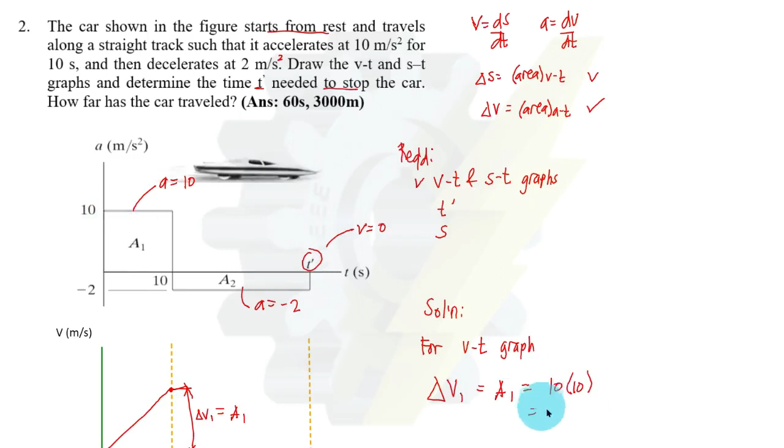So we can solve delta V1. Sabihin natin, ito yung ating delta V1 equal to A1. So ito ay sloping up to the right. Then yung A1 ay equal to area dito: base ay 10, height ay 10 din. So 10 multiplied by 10, we have 100 meters per second. So this is 100. Ang initial velocity natin ay 0.

Then next, we have negative A. And then our final velocity based from the problem is 0. So magre-rest siya dun sa T prime. So we can just simply connect this point to this point. Ang delta V natin from 10 to T prime ay negative 100. Okay, kahit di nyo na ilagay yun, kasi alam natin 0 yung final velocity. So now we have the VT graph. Next, we have the ST graph.

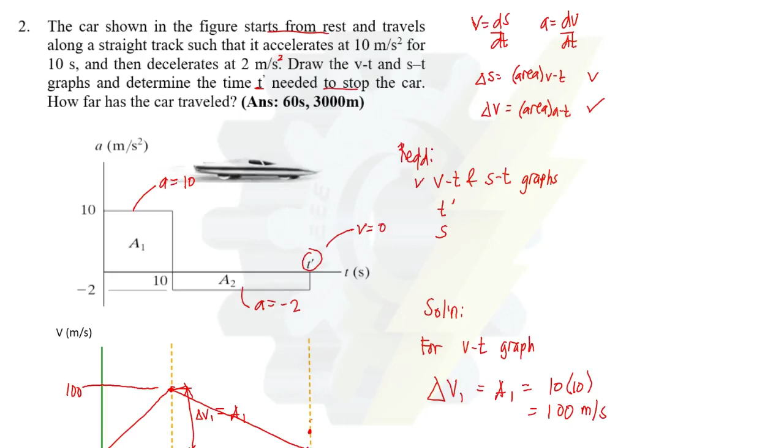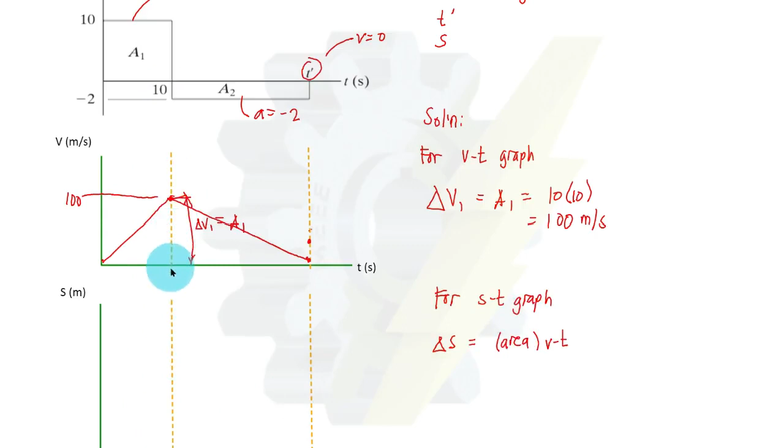Ang next relation na gagamitin natin ay yung area at VT is equal to delta S. Doon tayo sa first segment, 0 to 10 seconds. Yung broken line, ibig sabihin, yung time natin dito ay pareho lang dun sa nasa taas. Okay, so ito ay first degree. Alam natin na pag first degree at increasing, ang ating curve for S ay concave up. Ang susolve na lang natin ay yung delta S dito. This is delta S1, and that is equal to this area. Let us denote this as area sub 3. So delta S1 is equal to area sub 3.

This is equal to area of triangle. Ito ay 10, tapos ang height ay 100. So 1/2, base ay 10, height is 100. So this is equal to 500 meters. So this is your 500. Then next, ito, alam natin, sloping down to the right. Pagka ganyan yung ating velocity, ang ating S ay concave downward.

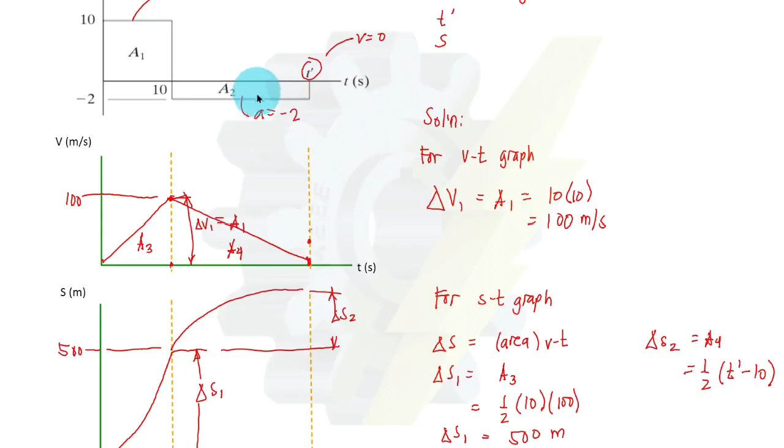So let us solve delta S2. Let us denote this as delta S2. That is equal to area 4 or area of triangle. So 1/2 base. Yung haba nito, mula dito sa point na to hanggang dito, ay t prime minus 10. Wala pa tayong t prime, and yung t prime ay isa sa mga unknown. Pero pwede na nating i-solve yung t prime based dito sa relation ng AT tsaka ng VT. Kahit yung t prime yung una nating sinolve kanina sa first solution natin, pwede.

So for t prime, from the relation, delta V is equal to area at AT. Ang delta V natin, take note, hanggang dito sa point na to. So yung velocity at t prime minus yung velocity at 10 seconds. Yung final velocity natin, sabi natin kanina, ay 0. Then yung velocity at 10 seconds, alam natin ay 100 meters per second. So again, we can use the relation area at the AT curve is equal to delta V. This time, say this is delta V2.

Delta V2. So yung area dito, base, ay t prime minus 10 multiplied by height is negative 2. So that is equal to delta V2. So negative yung V sub 10 or yung velocity at 10 seconds. So 100. Then from here we can solve t prime. So that is equal to 60 seconds. So dito pa lang kanina pwede nating i-solve yung t prime.

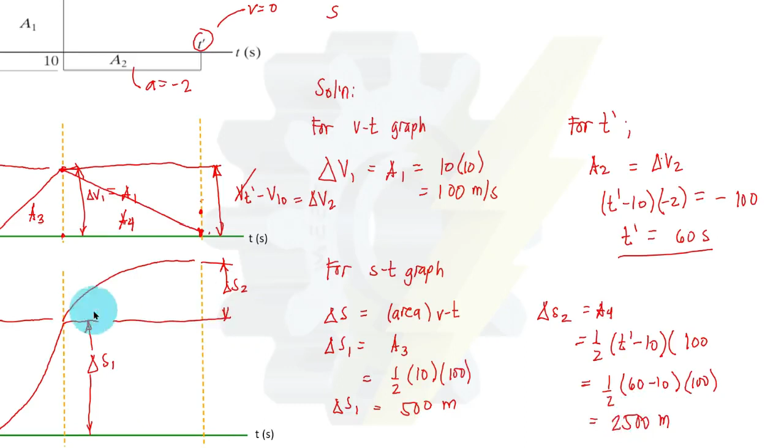Now we can substitute t prime dito sa ating equation to solve delta S2. So 1/2, t prime is 60 minus 10. Then yung height natin dito, so 100. So therefore we have delta S equal to 2,500 meters. So yung delta S natin dito, scale na lang natin. So ito gawin na lang nating mas maliit. So delta S1, then ito yung delta S2. So ito yung 2,500 meters.

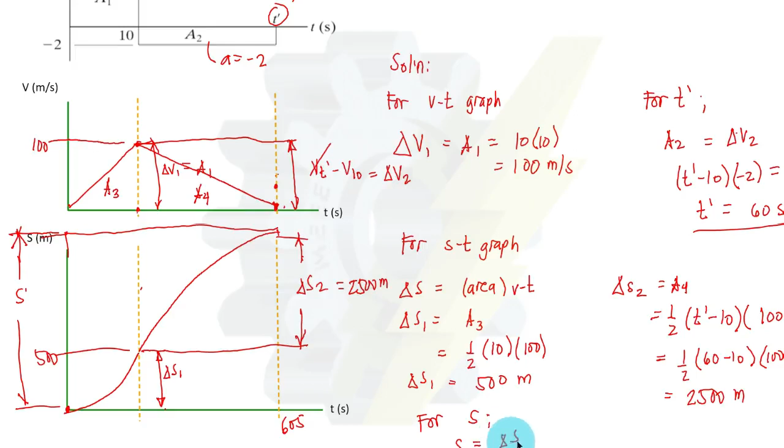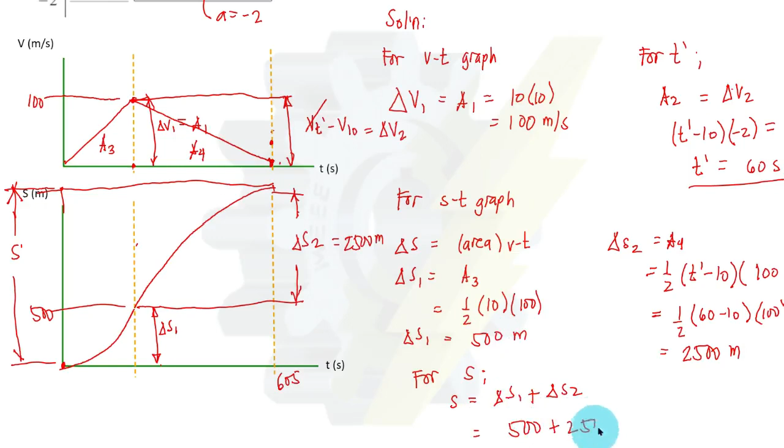Then yung isang unknown dito, yung total distance traveled. Actually, yun ay mula dito sa initial position hanggang dito sa t prime na 60 seconds. So for short, sabihin natin S na lang yon. So mula dito hanggang dito, yun ay actually sum ng delta S1 tsaka nung delta S2. Or that is simply 500 meters plus 2,500 meters. So we have 3,000 meters.

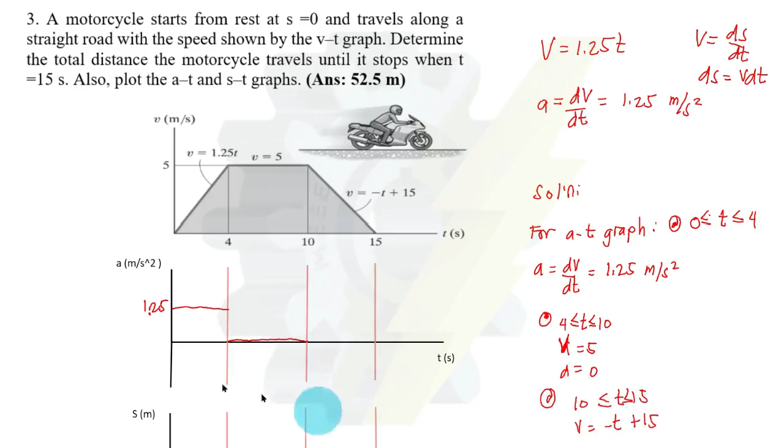Same lang dito, pwede natin i-solve yung slope. Rise ay 5, tapos ang run ay 4, so 5 over 4 or 1.25. Same lang yung makukuha nating sagot. So next segment tayo sa 10 to 15 seconds. Ang v ay negative t plus 15. Acceleration is equal to dv/dt. Differentiate natin ito with respect to time. So we have negative 1 meter per second squared. So negative, dito tayo sa baba.

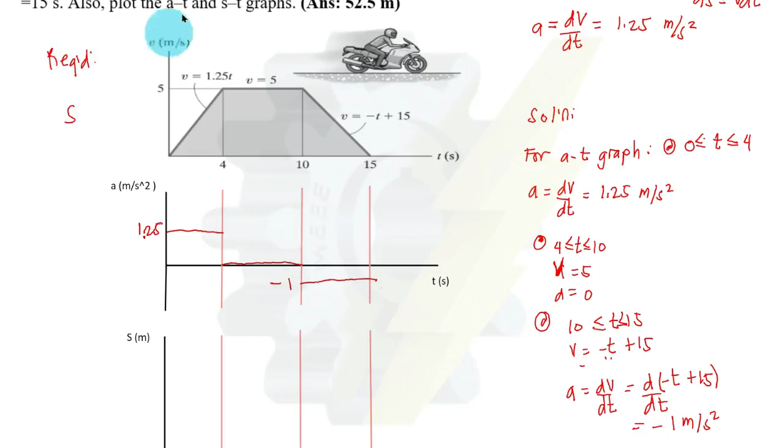So ang required pala dito ay yung total distance traveled na s at yung AT graph tsaka ST. So doon tayo sa ST graph. Again, we can use the relation delta S is equal to area under VT. Ito yung gagamitin nating relation para i-graph itong S. Yung ating velocity dito, first degree. So therefore, ang ating S, second degree, concave upward. Say this is delta S1. Next segment, constant yung ating velocity, so ang S natin ay first degree or straight line. Pwede na natin siyang i-drawing.

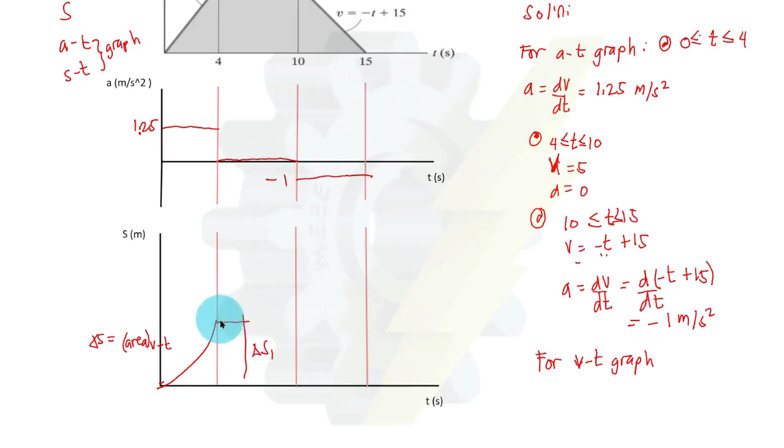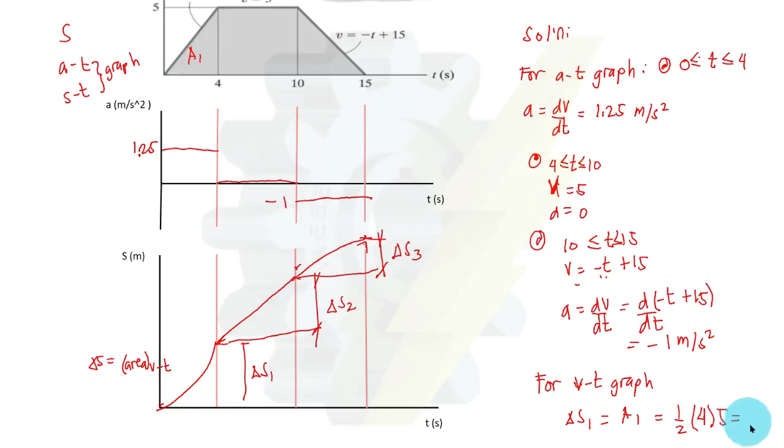Then last, yung sloping down to the right, so therefore, yan ay concave downward. Say this is delta S3, then this one is delta S2. So using the relation, delta S is equal to area under VT. For segment 0 to 4 seconds, delta S1 is equal to area 1, or simply 1/2 base, 4, times height, 5, so we have 10 meters. The next segment, sa 4 to 10 seconds tayo.

So ang area natin ay area ng rectangle. Ang base natin ay from 4 to 10, so 6. Let us solve delta S2. Ang base ay 6 or 10 minus 4, then yung height ay 5. So this is equal to 30 meters. Then lastly, delta S3. That is area of triangle, so 1/2, base ay 15 minus 10, so 5. Then our height is 5, so we have 12.5 meters.

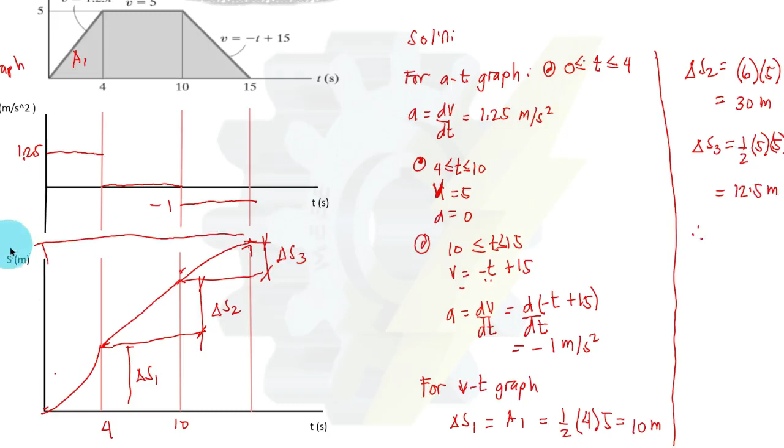So therefore, yung last unknown na s, yung total distance traveled, ay equal to delta S1 plus delta S2 plus delta S3. This is equal to 10 plus 30 plus 12.5, or 52.5 meters. So that's all for this video.